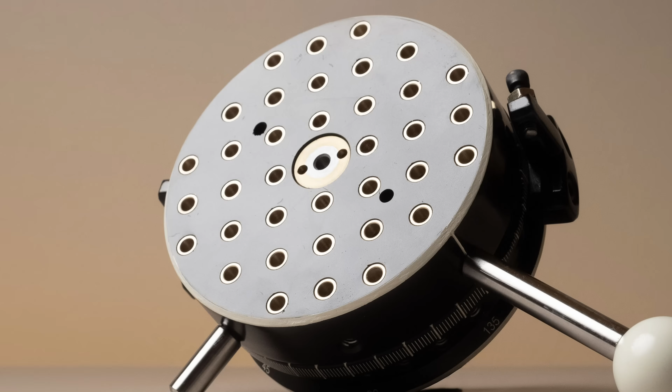In one of my most recent videos, I showcased how you can replace tool steel with plastic by 3D printing your own ER32 tapping collets. And that worked way better than I ever could have expected. So this time we're upping the ante, swapping out 100 pounds of cast iron for about 20 bucks worth of plastic. You're gonna wanna stick around for this.

We are attempting, and I cannot emphasize that word enough, attempting to 3D print our own rotary fixture table. It's all in the name. It's a table you can fixture your parts to, and it rotates. That by itself is basically useless, but if you slap it onto a milling machine table, all of a sudden you have a precise and accurate way to cut circles, and well, circles into steel and aluminum. Rotary tables can do a bunch of other stuff, but we're not gonna get into any of that today.

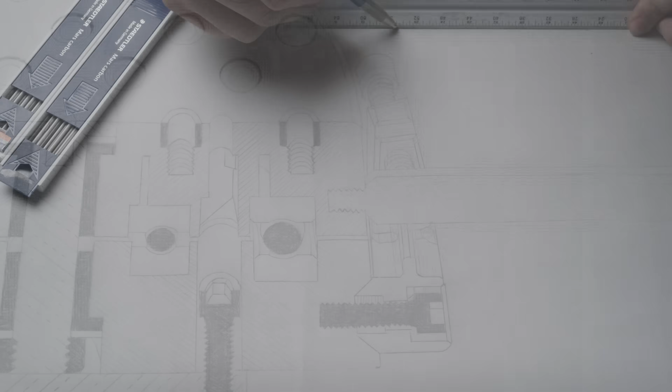Okay, but like why? Why not just buy one? You know, sort of like a normal person would? There has to be a reason why no one has ever done this before. Are you really gonna sink a bunch of time and money into a project that will most likely fail? Yes. Yes, I am. And the reason why I'm gonna do this, well, it's complicated, but not complicated. It's the usual bag of delusion: costs money, too big and heavy, and the traditional ones take forever to set up. That last one is the real killer, as if something is difficult to set up, I'm just never gonna use it.

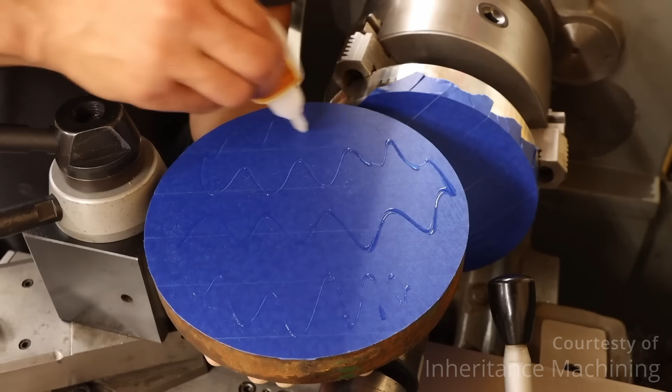But that all changed when I saw Inheritance Machining's rotary fixture table build video. If you haven't seen his, well, I don't know what you're doing down here at the bottom of the barrel. His build ditches all those typical inconveniences to the point where even someone as lazy as me will have no excuse not to use it.

There is a problem though. His build requires a rotary table to, well, make the rotary table. That and a bunch of other tools I do not have, but like I said, my ER collet video worked out pretty good. So I was kind of like, maybe we just 3D print one? We're gonna find out.

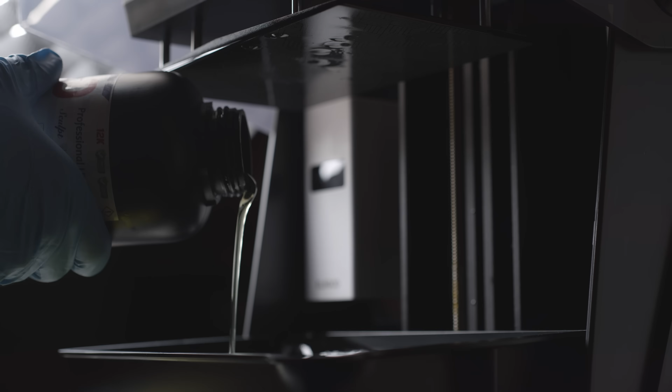With the design stolen, we can jump straight into 3D printing. Now, for me, it's all about the looks, so we're gonna keep the spaghetti in the corner and we're gonna break out the sauce. Probably a bad idea, but for this project, I really wanted to use Siraya Tech's Sculpt Clear resin. And I say wanted to, because all of my test prints just kept coming out wonky and weird. Tolerances are all over the place, features are drooping, bizarre surface artifacts. I'm pulling my hair out trying to figure out what is going on, why? Eventually I just give up. I'm like, let's just use a resin I actually know works.

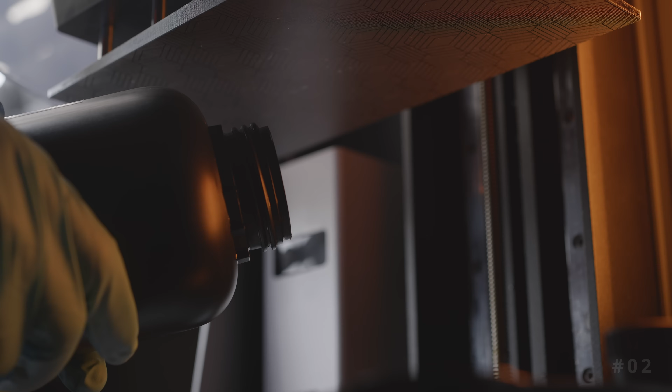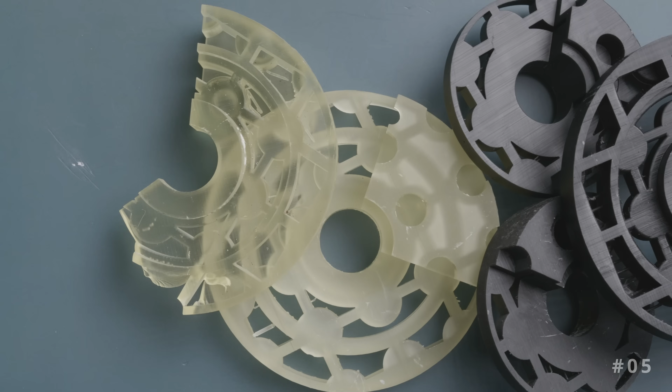Tried and true, something accurate and precise, and same problem. Okay, maybe it's the batch. Let's get a new bottle. I know this stuff works. Nope, same problem. Orientation, change that up. Nope, same problem. FEP sheet, that thing's really old. We replaced that, it's gotta be fixed. Nope, same problem. At this point, I don't even know what to check anymore. My last idea is maybe the LCD screen is messed up. Test that, and yep. Sure enough, there's your problem. A whole bunch of dead pixels.

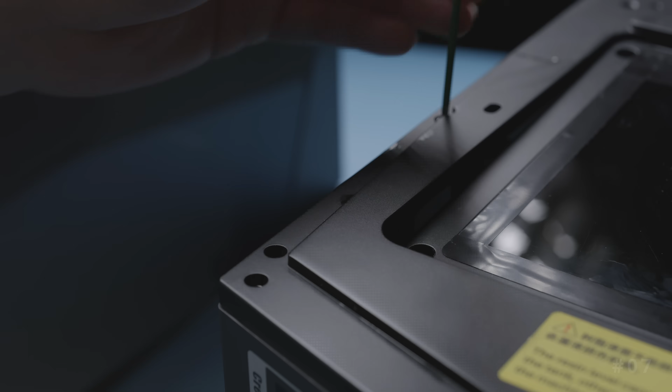Most likely from supports breaking off during a print, getting stuck in the vat, not getting cleaned out, and then on the subsequent print, the bed comes down and crushes them into the LCD screen. So there went $100, but honestly, I don't even really care about the money because at this point, my pain had only started to begin.

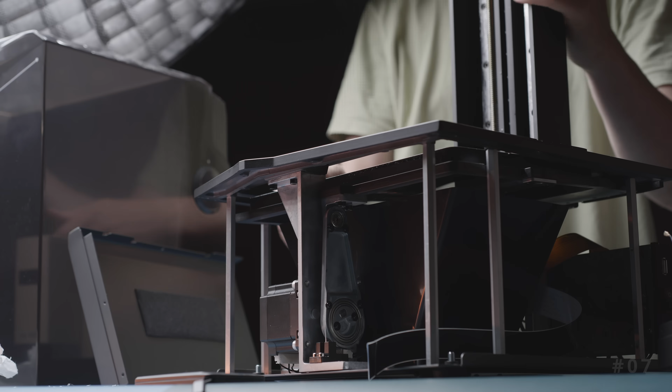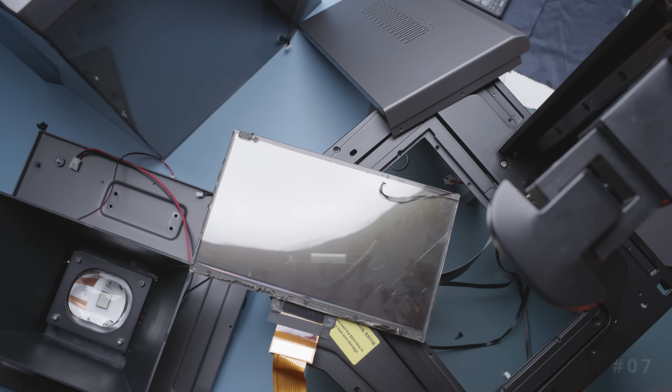Let me explain. To replace the LCD screen on this printer, and I'll remind you, this is a consumable item, something you're supposed to eventually do, requires you to disassemble, and I mean this literally, the entire printer. The entire thing. From stem to stern. Why on earth? It wouldn't even be this bad if it wasn't for the fact that this printer is supposed to have detection software that actually is supposed to stop this exact thing. Honestly, it is my fault at the end of the day. I should have checked, I should have seen if there was stuff in the vat, but it just feels so much nicer to blame others.

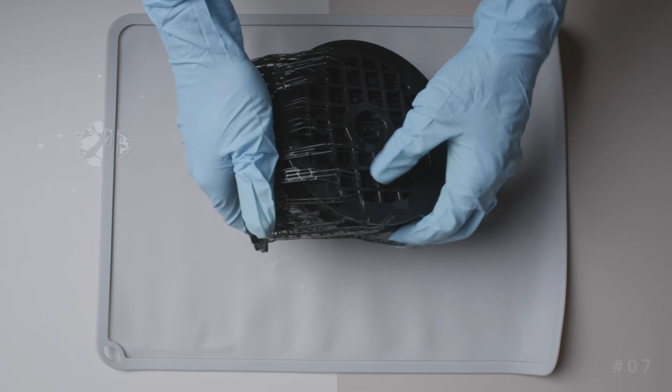Either way, with the machine rebuilt, we finally have a good test print. I've only been doing this in sections. This model has really been packing on the LBs. I put it on a major diet, and yet it still requires nearly an entire liter bottle of resin. Things did start to go my way though, as the final print came out looking gorgeous, or at least I hope this is the final print. Fingers crossed.

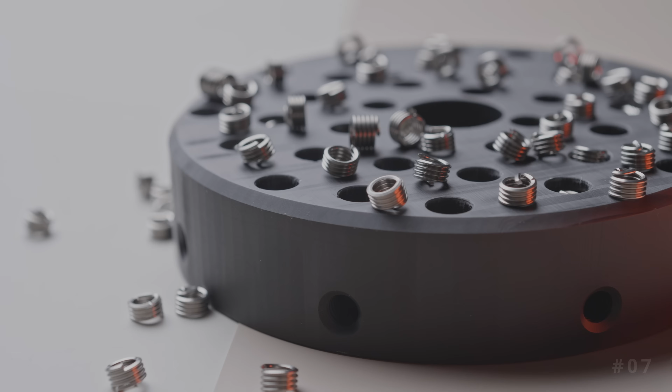After that, I threw in a bunch of threaded inserts. If you want to know how I install threaded inserts into my resin prints, check out my other video below. Next up, sanding.

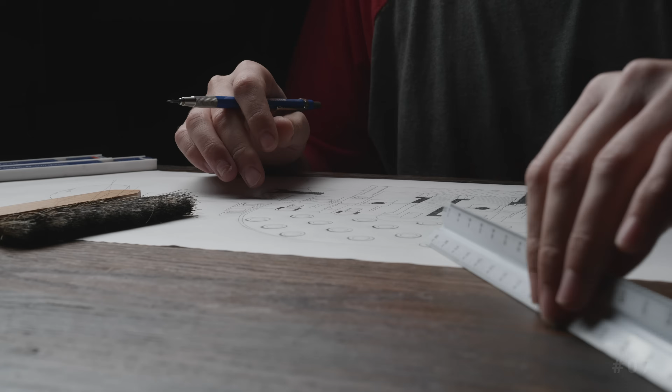I was about halfway through sanding when I realized, what are you doing, Michael? You need to actually test this thing before you sink any more time into it. There is one more part though that we need to make before we can test: the center arbor, which luckily means we get to do some honest to God machining, or at least I thought I was lucky. The center arbor is a really basic part. It's just 3 diameters and a thread on the end.

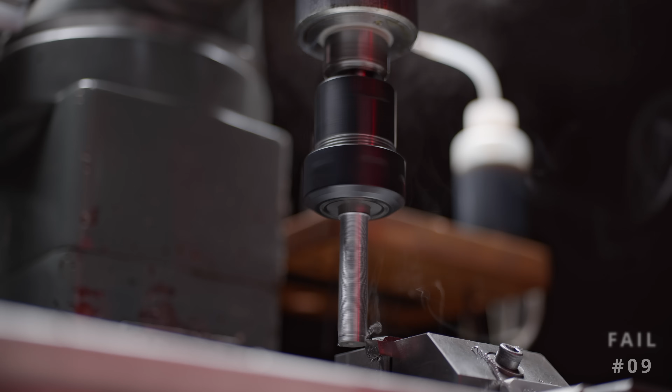We're gonna have our mill pull double duty as a lathe, and already a problem. I cut the stock too short and there's not enough engagement into the ER collet. Round 2 went smoother, but I am picking up a little bit of a taper. Perfect example of why you really shouldn't use a mill as a lathe. But a little bit of emery cloth and some sanding, and we can dial that taper out and get the

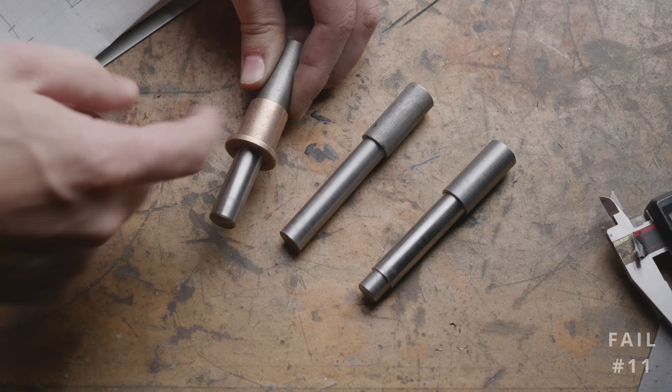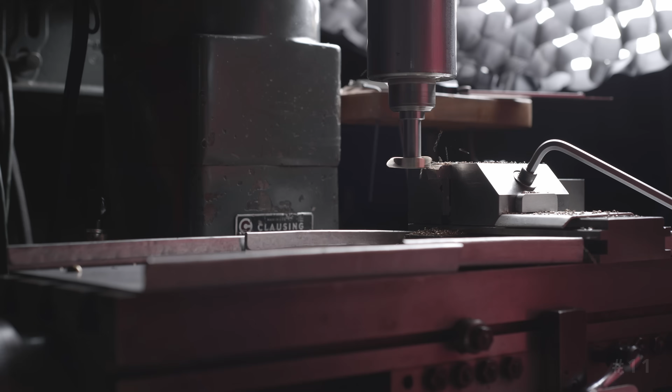fit just right. Well, it's a little easier said than done though, because this is actually my 3rd attempt. The first one was slightly too loose, the second one was way too loose, and the third one I actually took my time and pretty much nailed it. Now we aren't done because I decided to make this a 2-piece deal, mostly because turning 1 inch of steel is way harder than turning 1 inch of brass.

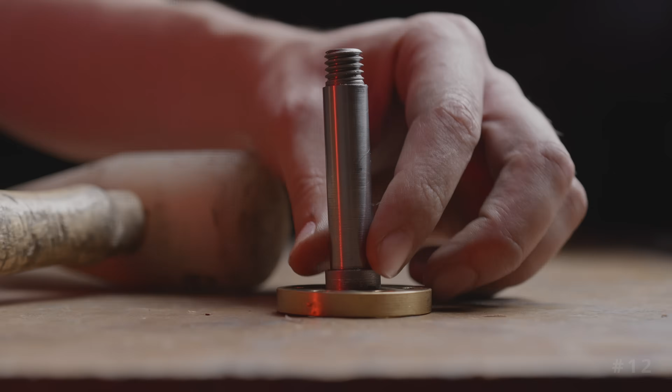But I made a mistake again. When I was pressing on the arbor, the thing wiggled all over the place, leading to a very loose connection. Some liquid persuasion in the form of Loctite though fixed that issue real quick. Final step, we need a precision bore in the top for an alignment pin. Again, should be a simple task, one that I managed to mess up over and over again.

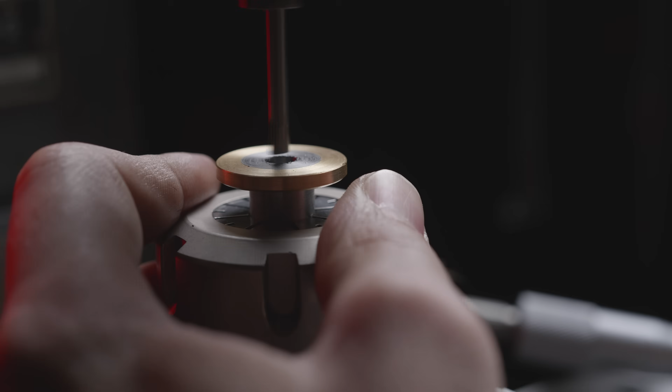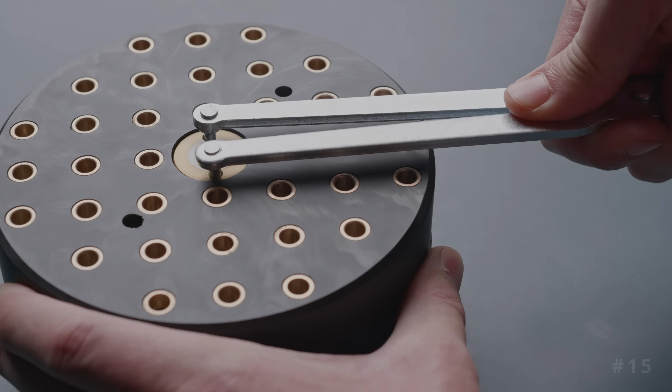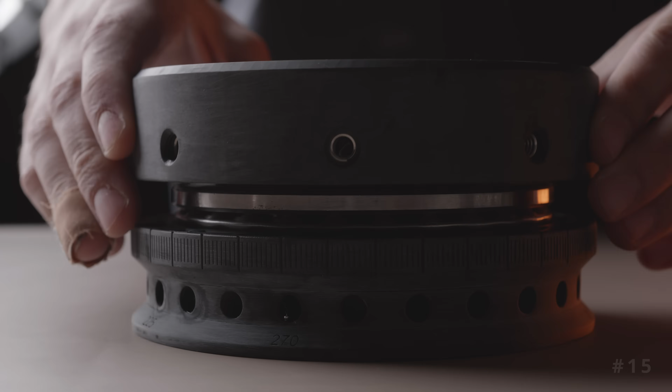Turns out my vise was loose. I mean, it looked tight, it felt tight, it even smelled tight. But these grinding vises, they can be a bit deceiving when they get stuck in between indexing slots. So after a literal clown car's worth of mistakes, the part is done. Oh, fake out. I added a couple holes to the top for a spanner wrench. And now we can do a quick assembly and actually test this thing. All this work could be headed straight for the trash. I really hope not though.

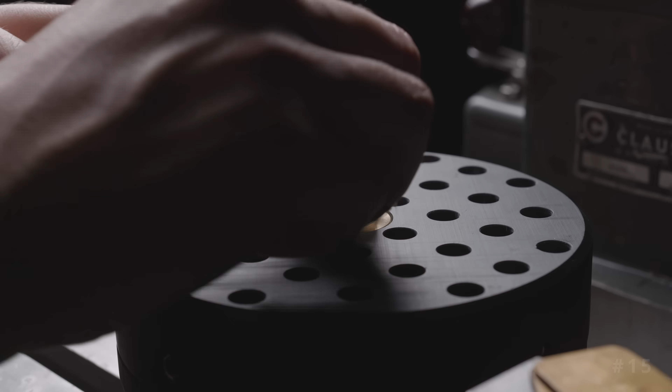Setup for the rotary table was pretty straightforward. A pair of internal cap screws connected to the T-slots in the mill table. We then plop our material down onto that center alignment pin and then death grip it in place with some teeny tiny little strap clamps, which are honestly my biggest worry about the whole thing. Before I forget, our material we're cutting is 3/8 aluminum tooling plate getting smacked in the face by a 3/8 high-speed steel end mill, roughing style. So pretty much as light duty as it's ever going to get.

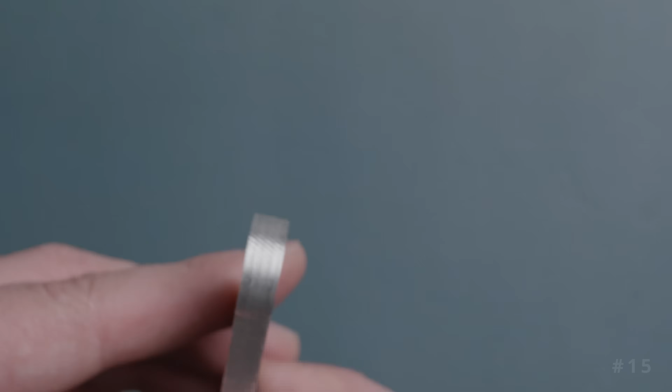Still, I'm taking it easy at first with only about 1 thou, oh no, not 1 thou, 10 thou step over. 1 thou would be a little too light. And much to my surprise, it's going pretty good. Yeah, to the point where by the end I was doing a full 50 thou step over, which is certainly nothing to shout to the masses about, but it's a good start. And we're certainly gonna really push this thing at the end.

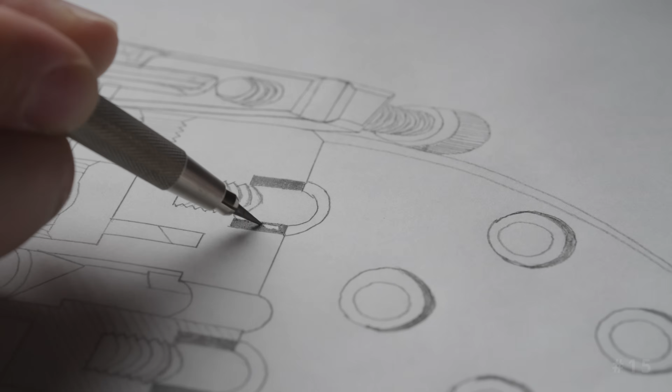We know the thing works. Now we need to just add on all the accessories that make it work good, like these bushings, which are just an off-the-shelf part and get pressed into all the holes. The bottom of the hole is a thread, while the top of the hole is a bushing. The threads allow us to clamp our parts down to the rotary table, while the bushings, coupled with alignment pins, allow us to dial in very specific offsets to our spindle.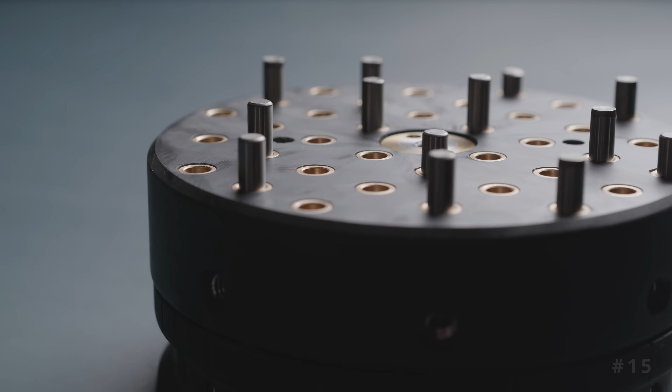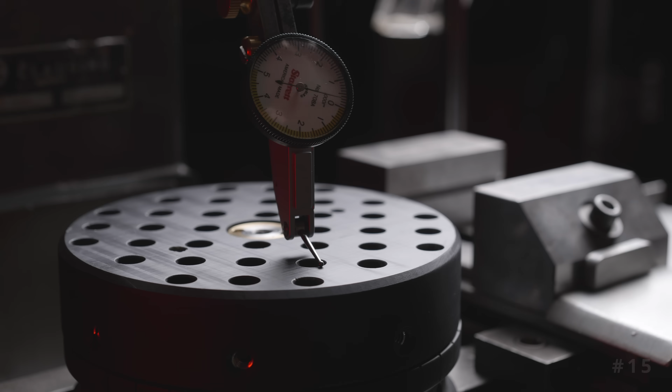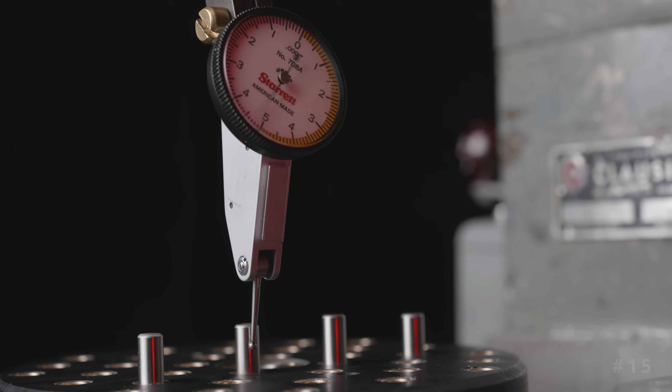And for the first time on the entire project, nothing actually went wrong, much to my surprise. That said, the bushings could work loose over time due to plastic creep deformation. Only time will tell. While I was at the mill, I decided I might as well run a dial indicator over this thing and satisfy my own curiosity as to how well it actually printed. And again, to my surprise, pretty darn good at only 5 thou runout, and that's straight off the printer. We can definitely improve that. The pin alignment and squareness was also pretty good at only 3 thou variation between the pins.

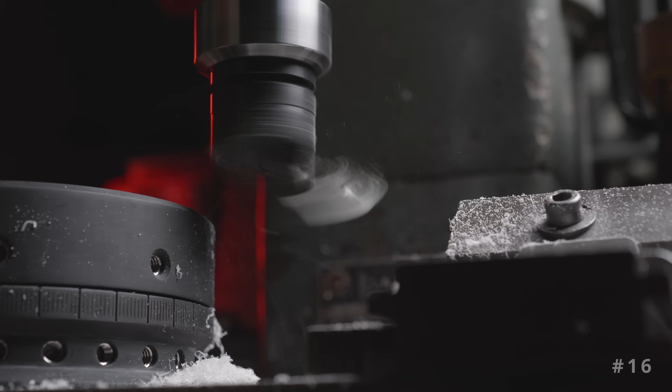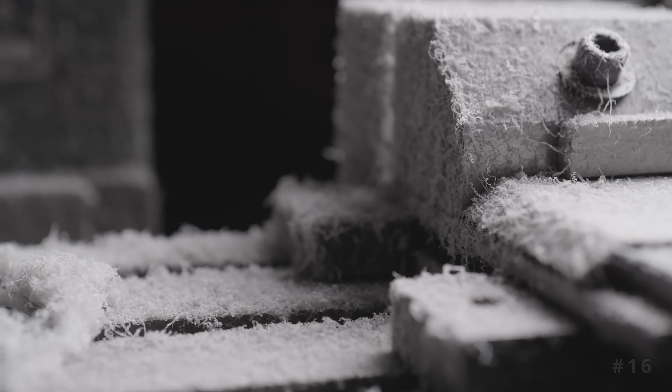Now, to try and improve that runout, we're going to send a fly cutter across this face. And of course, I immediately made a mistake. Once again, forgetting to tighten something. How many times can you do that? Like, seriously. It led to a bit of tear out, but we tightened the tool up, replaced the chipped insert, did some light passes, and it cleaned up pretty decently. Although not without consequence, as it now looks like it snowed all over my parents' garage.

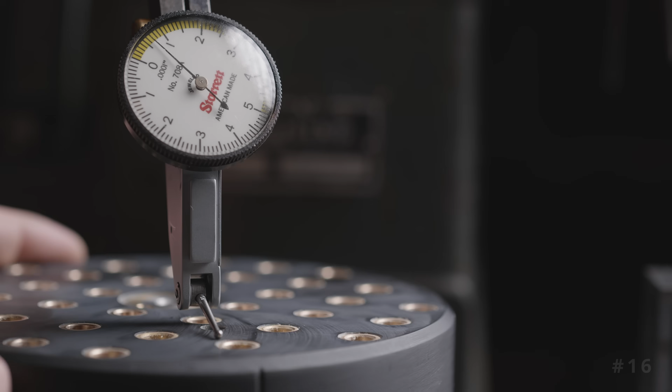Oh, and before I forget, the runout did improve from 5 thou to 3 thou, so I'll take it. I mean, if I had machined these parts from steel or aluminum and I was getting these numbers, I'd actually be pretty depressed. But for the fact that I just hit print and go, I'm pretty happy.

The final two machined accessories that we need to make are the mounting plate and the handle. The mounting plate is actually not necessary at all. You saw earlier, god damn it.

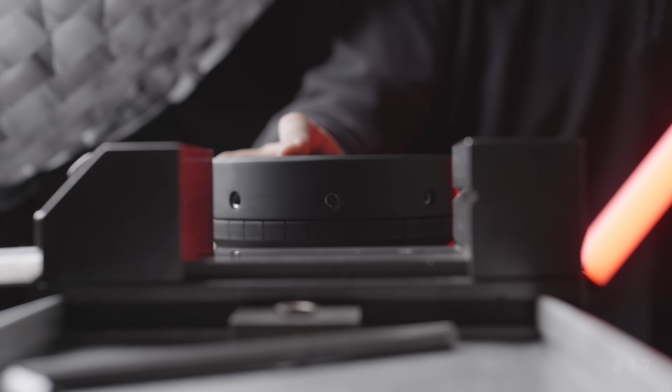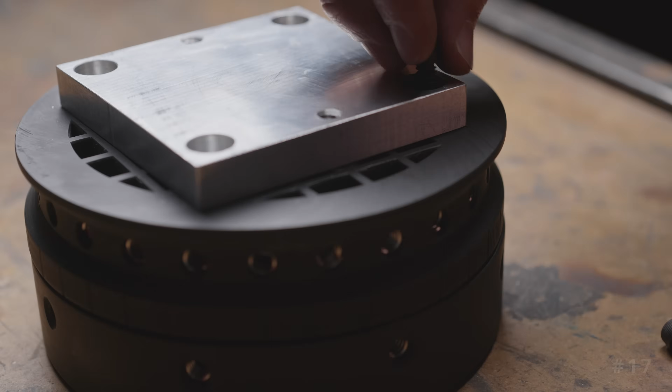The mounting plate is actually not necessary at all. You saw earlier, we bolted the rotary table directly to the milling table using its T-slots. But this subplate makes it so we can bolt it directly into the vise. This is not only useful for quick setups, but it gives us a repeatable position. So we can take the rotary table on and off, over and over again without ever losing our alignment. Or at least that's the idea behind it. Remember, I'm stealing all of these concepts from Inheritance Machining's original build.

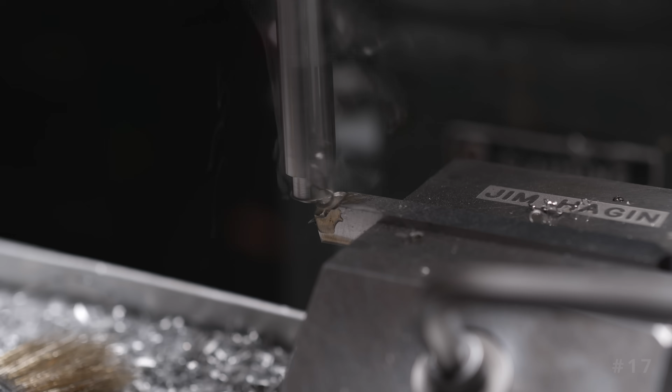The final machined part was the handle, which is a really basic part, like I've been saying all along, but this time everything went according to plan. It's made from 304 stainless and has threads on the end, 1/4-20. The only real trick to the part is it has a chamfer on it that has to perfectly match the chamfer 3D printed into the body. This is to give it a little bit more positive engagement when screwed in.

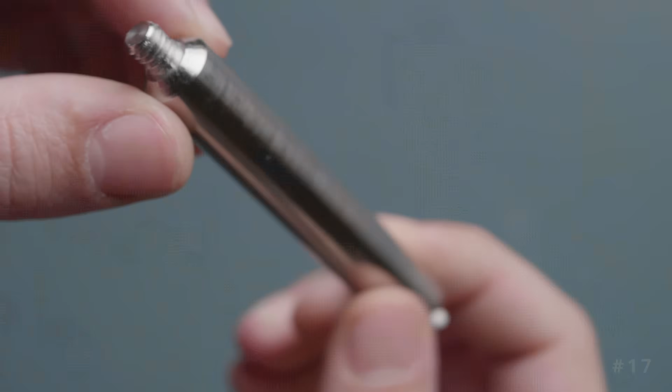The machined parts are completely wrapped up and all we have left now are the 3D printed accessories, starting with the knob, which attaches directly to the handle we just machined. The knob is a pretty straightforward and simple 4-speed shifter design, although it's specifically based off the shifter in my '61 Corvair. The cool thing about this model though is it's fully parametric, so if you need a different size, just type it in and bada bing, bada boom, you got it.

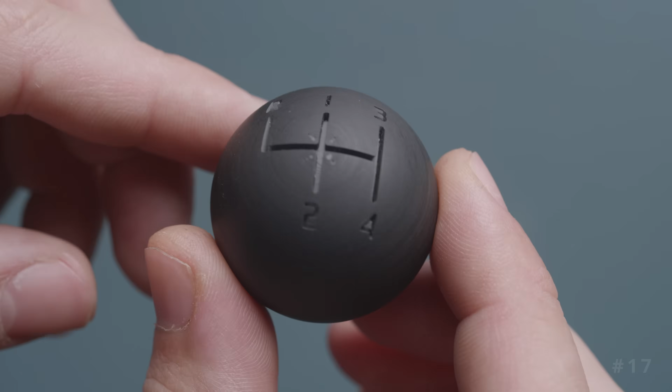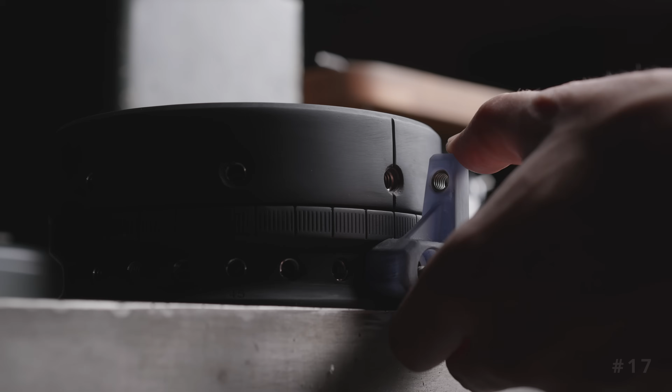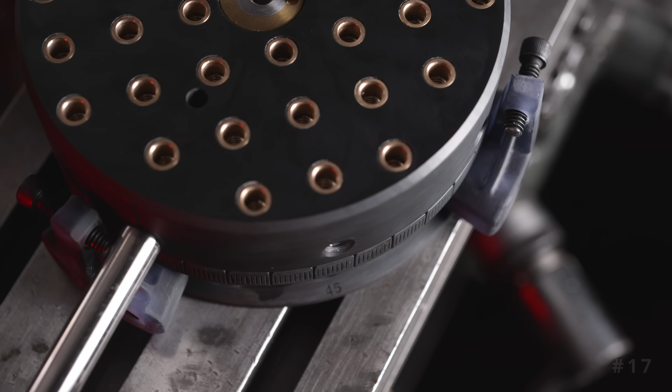The final 2 printed parts are a pair of hard stops and the table lock. Now, I'm going to dive into exactly what these do in a little bit, but the basic idea behind them is the hard stops interact with the handle and prevent the table from over-rotating. Basically, it makes sure that every time you swing it, it goes exactly 90 degrees, or however many degrees you've dialed it into. They have a pair of fine adjust screws that make dialing it in a complete breeze. While the table lock, well, locks the table. It connects the upper and the bottom together, primarily for doing indexing and hole patterns.

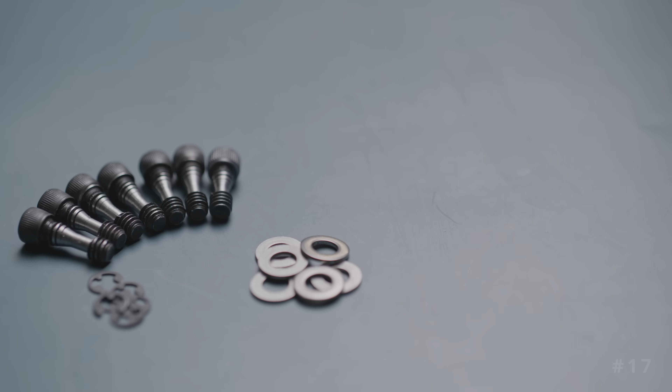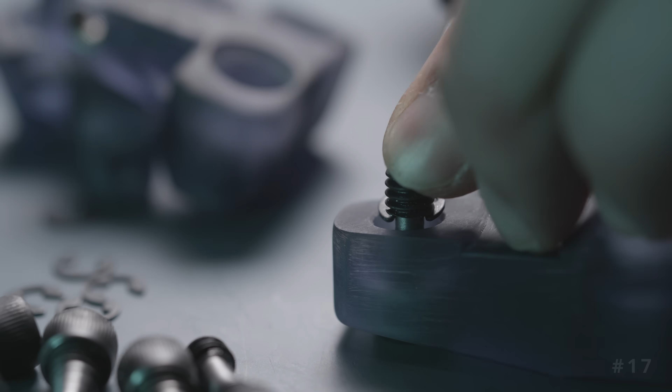The coolest part of these accessories, though, is the fact that the hardware is captured, meaning you can never lose the bolts, which I have done so many times in the past. This is accomplished by doing a back relief cut on the screw and then pressing on one of these teeny tiny C-clips. The other thing I discovered on this is the fact that they actually make undersized washers specifically designed for socket head cap screws. Like, how have I not heard about these before?

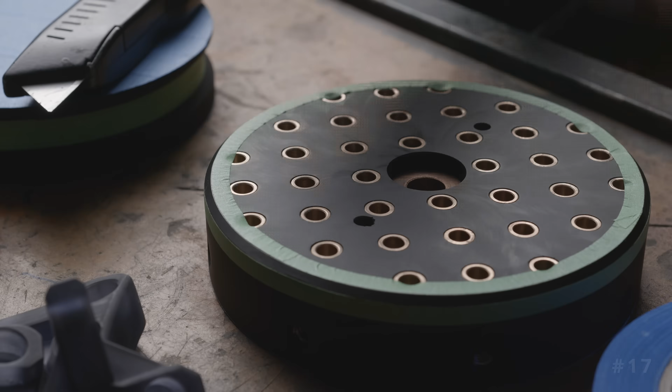Okay, I promise we are so close to actually testing this thing, and believe me when I say I am far more anxious to get to that point than you are. But we do have one last step, and that's going to be finishing and assembly. For finishing, I chose to go with black as the primary color and then the ivory / off-white as the accent color. Accents being letters, numbers, and the handle. After we do that, the whole thing gets finished with a 2K gloss clear coat for some heavy duty protection.

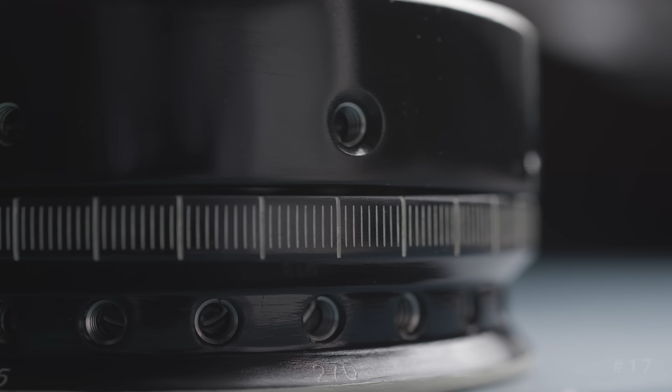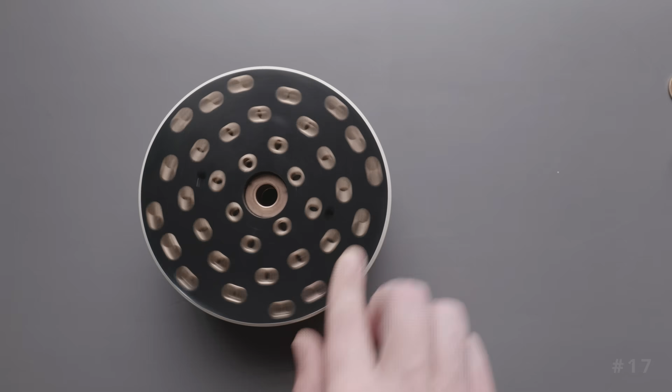Final assembly. Pretty straightforward. The 2 halves bolt together using the center arbor. Oh, and I don't think I've mentioned this yet, but those 2 giant bearing looking things, well, they're a pair of thrust bearings. Their job is to take up any of the downward loads acted on the table by the milling machine, while the center arbor takes up any of the side-to-side loads. And that, ladies and gentlemen, is the entire build. The only question now is whether or not it's garbage or greatness, and those are our only 2 options. Fingers crossed for greatness.

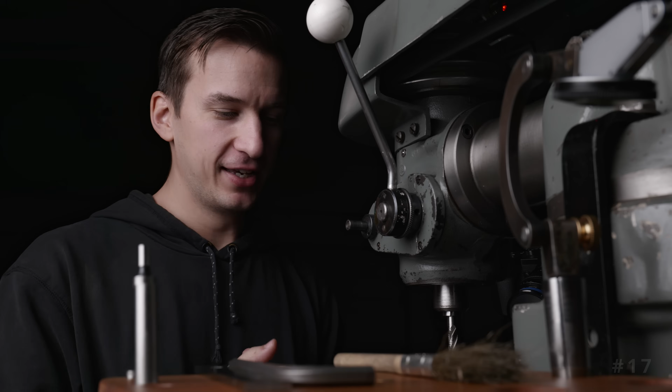Okay, finishing didn't quite go as planned. Assembly did, but not finishing. Right at the end, as I was doing the clear coat, literal seconds before I was about to call it quits, I managed to drop the part right onto my concrete floor, busting out the side. Yeah. It's how she goes, man. It's just how she goes.

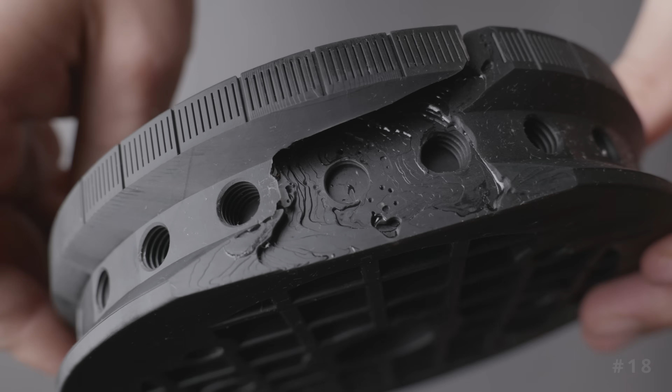So, it's 3D printed, so it's not the end of the world. All we gotta do is hit a button and we get a new one, right? Well, that only works if you actually have enough resin, which I thought I did, according to the estimation I did, but it turns out it's only an estimation, because once again, right at the end, I completely ran out of resin, and well, the printed part looks pretty much as bad as the busted out part.

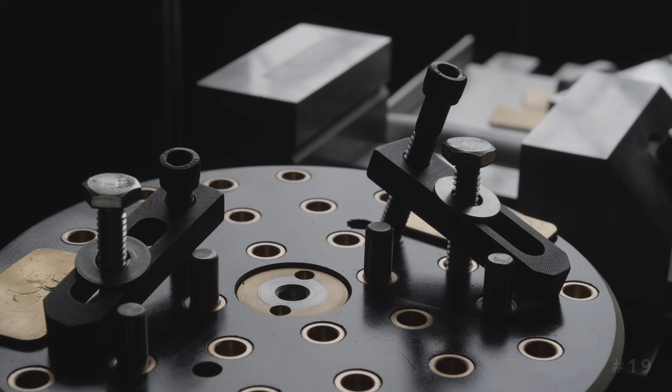So, I don't even care anymore. We're just going to test this thing. The damage really shouldn't affect its performance, so let's find out whether or not this thing works. Now, unlike the test before, this time we're going to use the pins to align the part rather than the center pin. We need to offset it exactly 3/8 of an inch, so we're going to use a couple 3/16 inch shims, and then we got our teeny tiny little strap clamps.

All right, here goes nothing, man. Let's see if this works. I really, really hope so. I just realized I'm climb milling, which is probably not the right way to do this. Whoa! Yeah, she moved. T-slots are not tight enough. You can't climb mill, Michael. You can't climb mill. God damn it.

So far, so good. Forces don't feel any worse than the rougher. Yeah, baby. Making some decent chips. I can definitely feel the vibration coming through now. Oh yeah, she's vibrating a little bit. But hey, it's taking it. Oh, look at her go. Okay, baby. Now we got something here.

That looks rather respectable. Hell yes, this thing is actually working. No more stupid mistakes. It's making decent chips. It's making a mess. I'm loving it. If this is all it can do, I'll be happy. But stick around, because we're going to see what this thing can do in steel.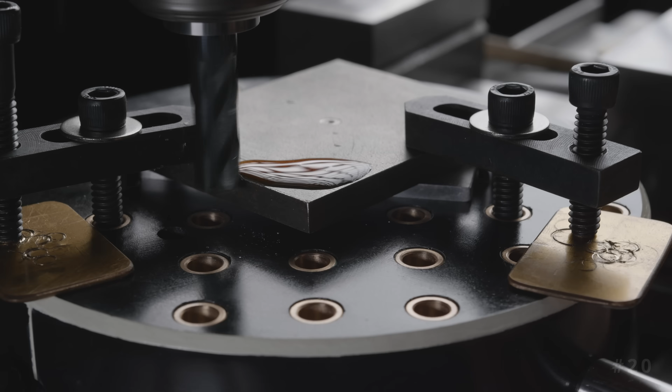Yeah, I don't know about this. It does not like that. Nope, it really don't like that. Yeah, no. Okay, let's try the rougher. Yeah, look at, I don't know about that. This is pretty sketchy. All right, let's try doing something else. I say I really don't like this, but it is doing it, sort of. Oh my God, it's vibrating.

That's what she said. All right, switching to 1/4 inch rougher. Better. I mean, we're still vibrating, but this is way better. Nope. All right. That's too much. Pushed her luck. Light passes. Definitely seems to be its happy place.

Like 10 thou? That's easy. You know, maybe this is it. You just do like really light 10 thou passes. All right. It did it. It's something. I'll take it. Cut.